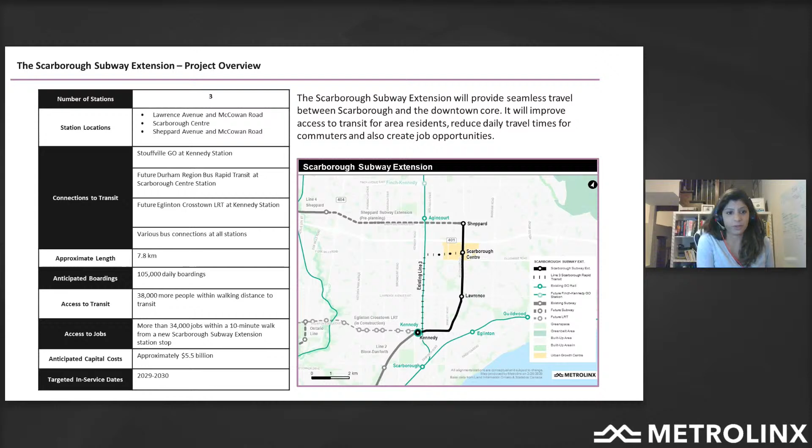The first contract is our advanced tunnel contract, and this is live and under construction. If you've driven by the Sheppard and McCowan area, you'll see a lot of construction activity underway, and the construction team's going to talk about that in just a little bit. STRABAG is our constructor.

I did mention the length of the project, and we anticipate tunnel completion by 2024. The second contract is the station's rail and systems contract, which is the remainder of the work: the design and build of the 3 stations, as well as ancillary buildings like emergency exit buildings, traction power substations, and all the supporting infrastructure needed to operate the line.

A key milestone that was reached is that we issued the request for proposal just recently, to 3 teams, which we're very excited about. The 3 teams are Dragados, KSX Integrated Design Builders, and Scarborough Transit Connect.

We're actually looking to deliver the station's rail and systems contract through a progressive design build model, which is a little bit different, and it's the first time we're doing it for transit here in Ontario. It's a key milestone for us, and a progressive design build delivery model is more of a collaborative model where we're working a little bit more closely with our development partner.

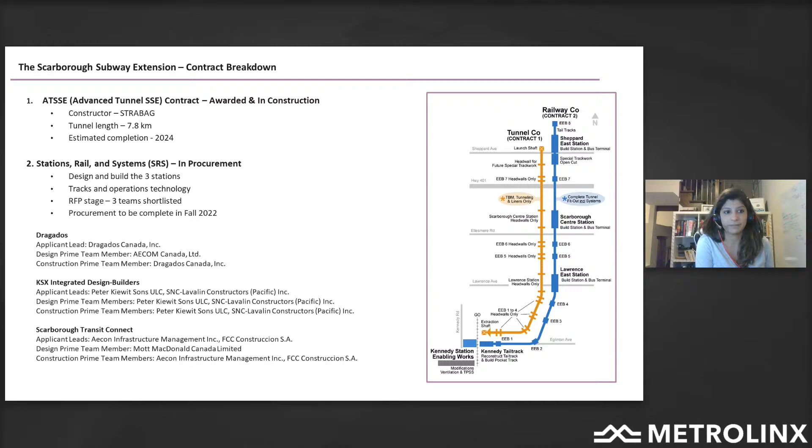Launch shaft is where we put our TBM, or tunnel boring machine, inside. It travels 7.8 kilometers and does the tunnel, and the extraction shaft is used for extracting the TBM.

In the launch shaft, we started activities last year and did quite a lot of work. The launch shaft should be prepared sometime in June for the start of the TBM.

The TBM is in the meantime already being assembled. It arrived in Canada last year in December, and assembly should also be finished by the beginning of June this year. Then the TBM will start its drive all the way to the extraction shaft.

During and before this drive, we will construct the head walls, locations of future stations and emergency exit buildings. We start with the first head wall next week, and we will continue this work all through the end of 2023, next year.

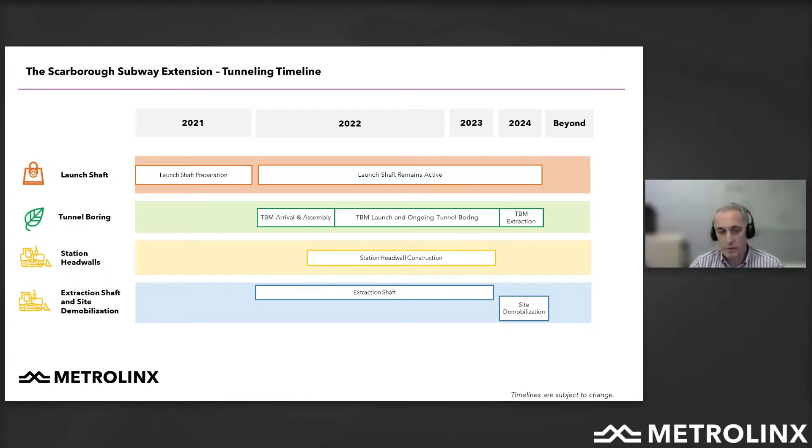The last activity is the extraction shaft, where we pick up our TBM. We started this activity this year and have to complete it before the TBM reaches this point. After extraction of the TBM, the last activity will be site demobilization, by the end of 2024.

As head wall manager, I will be responsible mainly for head walls and the surface works. A little bit more about head walls: like I said, we start on the first location next week.

This is Sheppard East Station. A month after that, we start on location EEB7. Some 14 days later, Scarborough City Center. And then a month later, EEB6.

This year we also start with two EEBs, number 5 and 4, and finish them this year as well. We also have Lawrence and EEB3 starting this year but finishing in the first quarter of next year. The last two EEBs, emergency exit buildings, we will start in the middle of March next year and plan to finish by October next year.

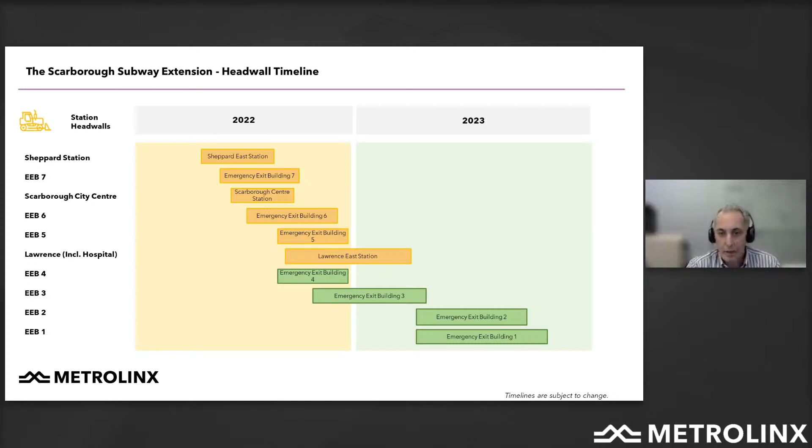There are quite a lot of trees along the alignment where we have our sites, so we have a special tree removal program.

We started removal of trees on February 15th. Most of the trees we will remove by the end of this month, with some little trees left to remove at the beginning of next month. We are notifying all the nearby residents, and the trees that will stay we will protect during construction.

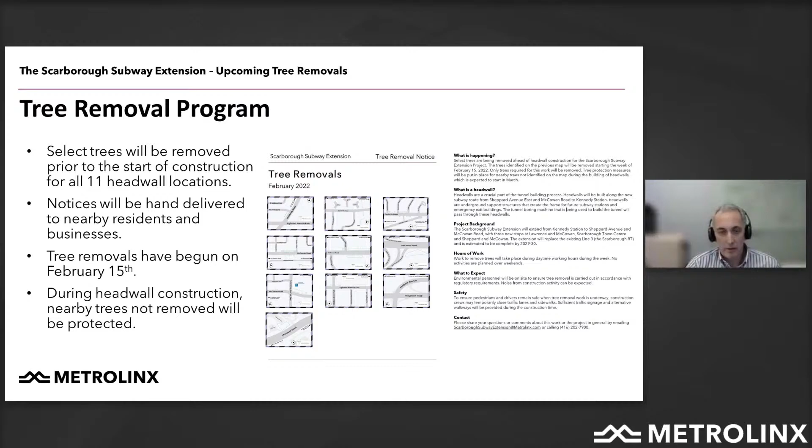All our works regarding tree removal and surface works are planned to be done during daylight time, so at the moment we do not plan any night shifts.

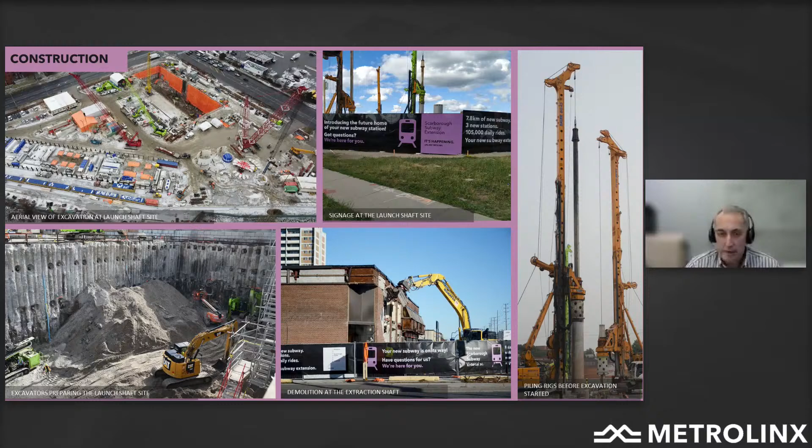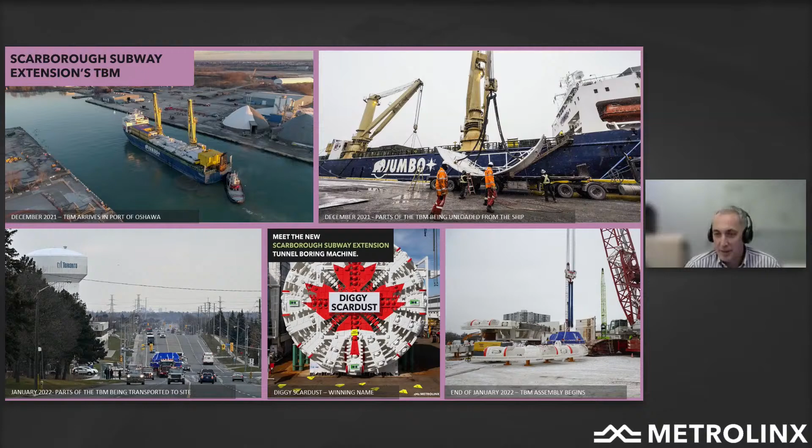There's also a secondary entrance located on the north side of Lawrence, also west of McCowan. This will provide quick and efficient connections to customers wanting to access the hospital, which is immediately adjacent to the entrance. We know the hospital is a major employer, employing more than 2,000 people, and this connection will provide a rapid option to employees who work here.

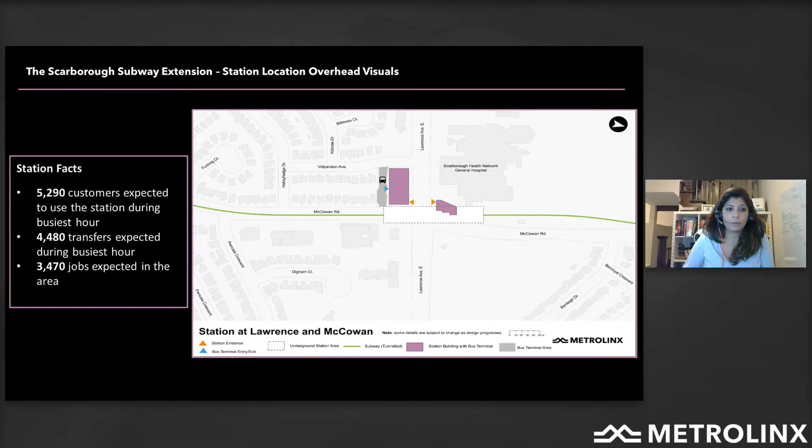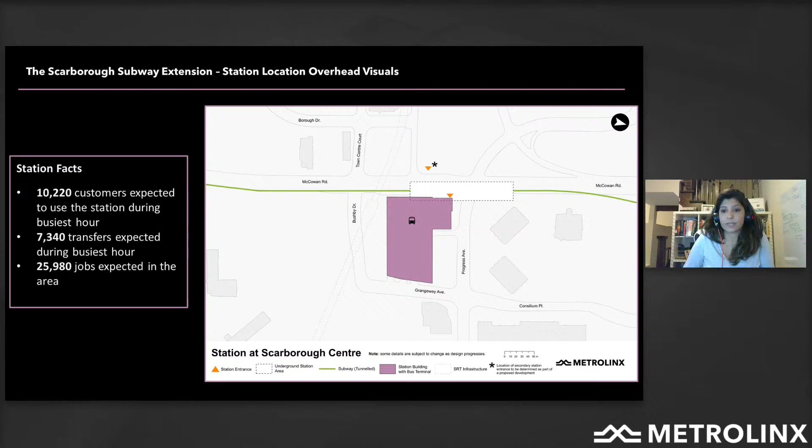An important note is that the station is going to be a busy station. We anticipate over 7,000 transfers at the busiest hour and approximately 37,000 daily transfers. We can move to the next slide.

Passenger-focused design. When we talk about passenger-focused design, it's good to understand that underneath all the engineering, the technical requirements, and the underlying systems that run the transit line, the stations are designed for you, the user, and also the surrounding community. Design of the station will focus on ensuring that you have a seamless, intuitive, and reliable station and station connections.

The stations are designed to last with material choices that are robust and long-lasting. The station will be designed and planned to make your intermodal connections seamless, regardless of what your next mode of transportation will be. Future growth will be at the forefront of our minds as we guide the development of these stations. This will include space-proofing for strategically placed knockout panels. This protects our future growth and helps keep the station running.

In regard to maintenance, the choice of materials is important. That's why our standards promote robust material selection. This directly feeds into making the maintenance of the station safer, easier, and which will also lead to a more reliable transit system.

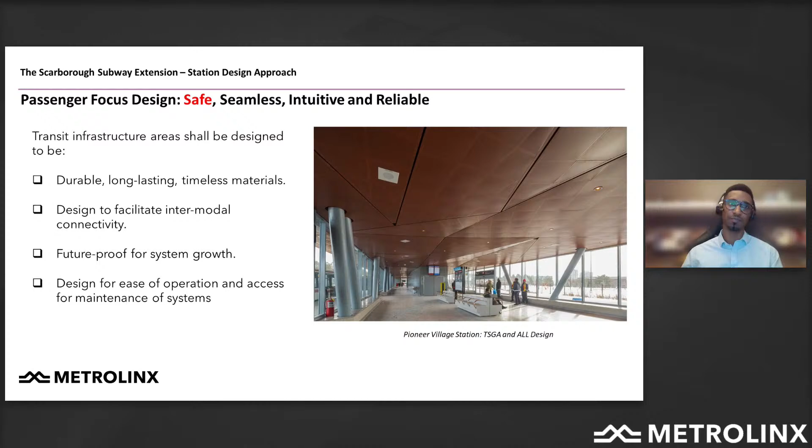Passenger focus, safety and accessibility. Stations will be designed to be safe for transit users, regardless of ability. We'll do this architecturally by trying to minimize the vertical and horizontal connections and make these connections as short and as direct as possible. We'll have waiting areas, rest areas, multiple elevator paths to the platform, and designated waiting areas with redundancy where needed.

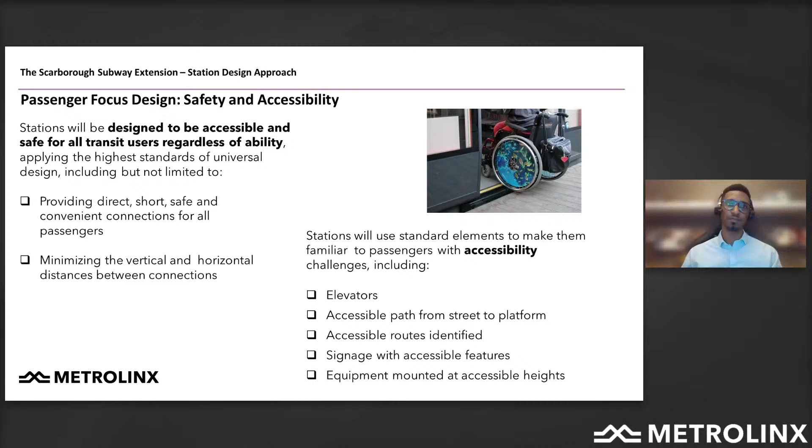Passenger focus in the public realm. Transit infrastructure is a key part of the public realm. Subway stations act as a major piece of infrastructure in the city. Stations act as a backdrop to our lives. The station acts as a gateway to the city and brings the rest of the city to the neighborhood. These stations will be iconic in the sense they will act as a landmark for the neighborhood. That is why the public space is so important. It is that interstitial space that connects the station to the community.

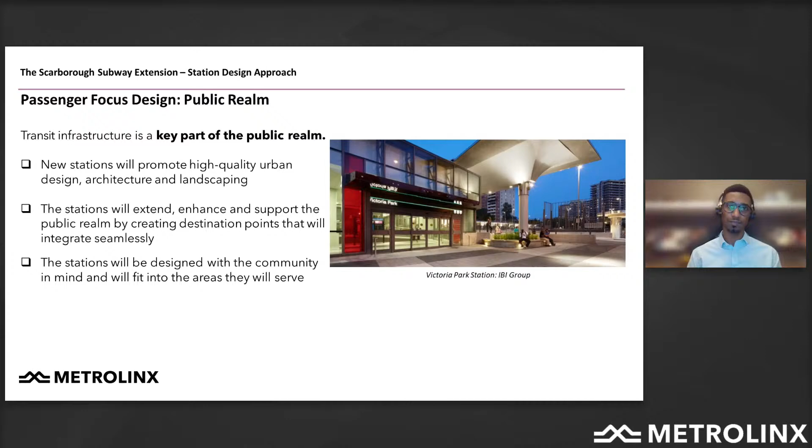We recognize that these spaces provide landscape features, hard paving, seating areas, and these will act as a bridge between the street and the entrance.

Passenger-focused design and intuitive wayfinding. When we talk about wayfinding, it's not only about signage, which we have robust standards for. It's about making sure that we create an environment that allows all users to use the system regardless of their familiarity with the station. It's about knowing where to go and how to get there as seamlessly and intuitively as possible. It's also not only about what's on the inside—it's about making the stations a recognizable symbol in the community. Regardless of the site context, there'll be elements similar enough that make the station recognizable as a station. This will include landscaping, street furniture, entrance canopy, signage, and the way that we approach the interior finishes.

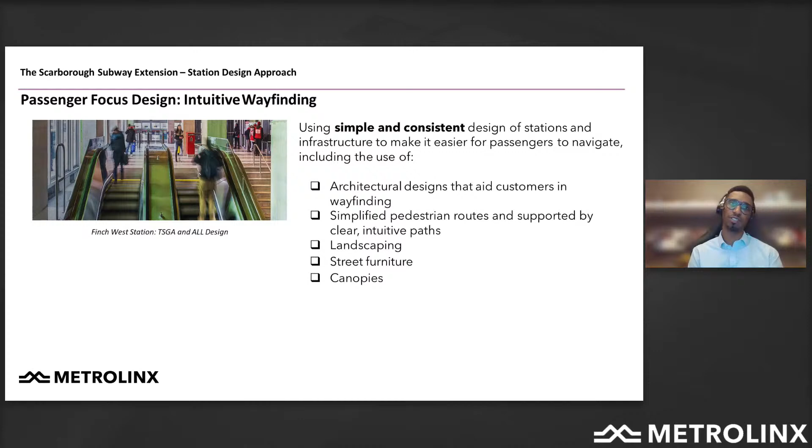Next slide, I think that's it for me.

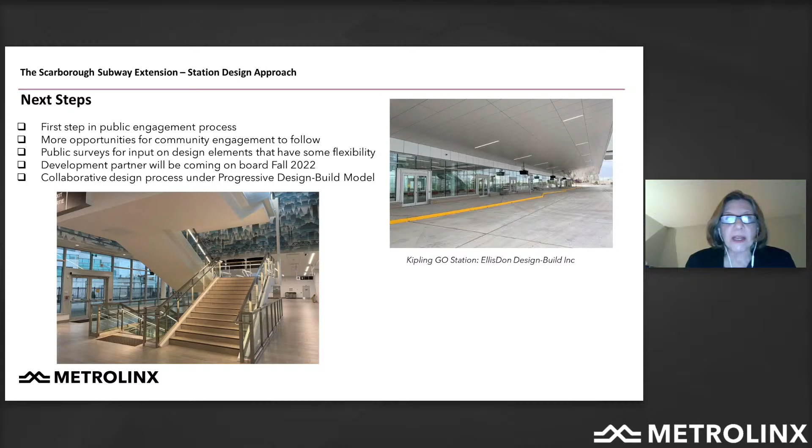With regard to next steps, this is really just the first phase in our public engagement process. We're going to have many more opportunities for public engagement in the design. This will include examples like conducting surveys about specific design elements and also having future open houses. As mentioned earlier, our development partner will be coming on board this fall. With our procurement model, we will have a very collaborative design process, so this actually makes it easier to have public engagement than with other development models.

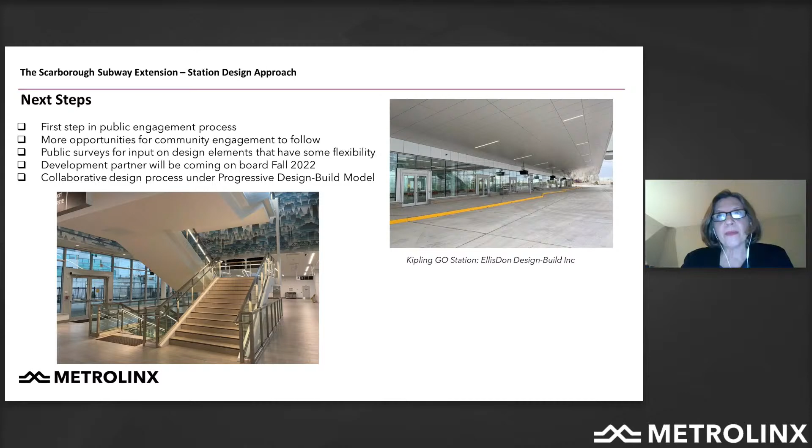To the project team, thank you Jenny, Ade, Victoria, and Andre for going through the content to discuss with everyone this evening. This slide is really important, and I want everyone to pay attention, especially for some folks that see ongoing projects happening in Scarborough as a region as a whole, and they may have some questions that are not related to what's happening on the Scarborough Subway Extension.

So our promise is to be a connection to support you with getting all of your questions and concerns answered. Our project email address is Scarborough Subway Extension at Metrolinx.com, and we also have our project number there, which is available 24/7 for you to reach out if you have any questions or concerns.

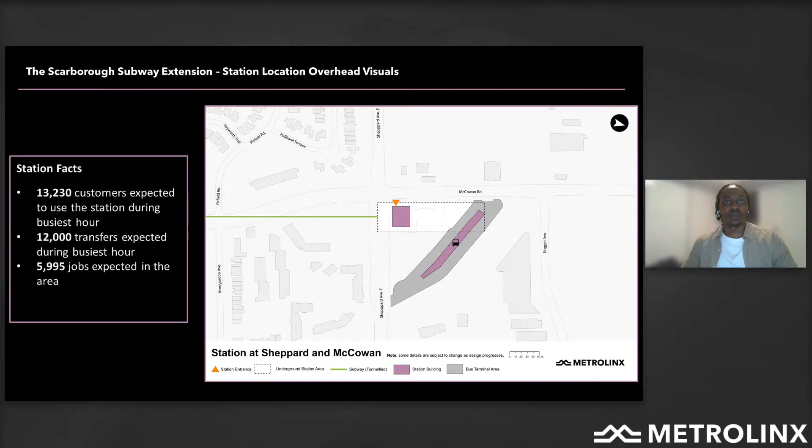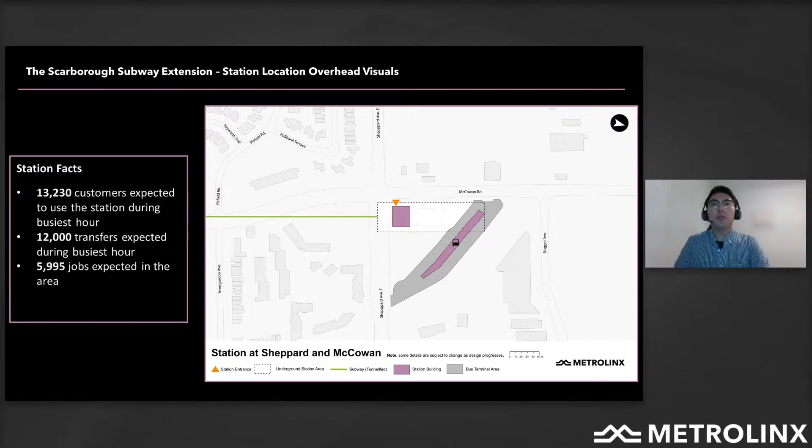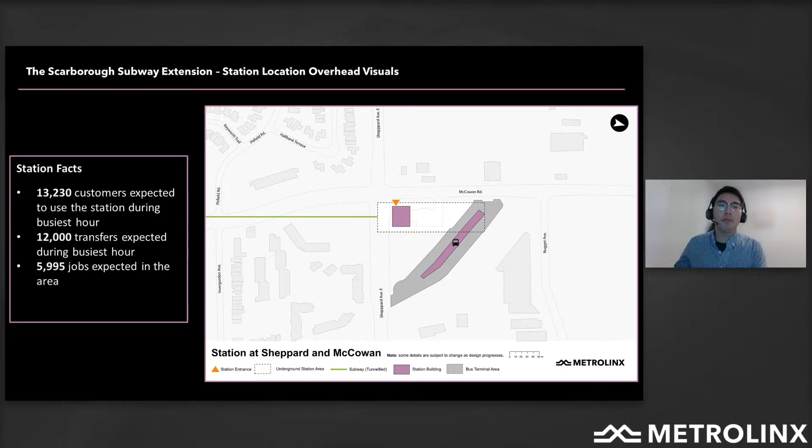Thank you. The next question we have is how does Metrolinx and the City of Toronto minimize impact on local businesses? I'm going to start with a bit of an explanation, and then I'll probably lean to my project team to add some more context.

When it comes to the impact on our communities and businesses, one of the main differences from this project versus others, like the Eglinton Crosstown that folks in Scarborough relate to, is that most of our activity is happening underground. So the types of support and impacts we offer might differ slightly, but we do plan to introduce a Shop Local campaign. We're going to collaborate with our local business BIA, representing the Sheppard East Village BIA, to develop a strategy and plan to help businesses that may be impacted. Again, with our subway stations underground, the types of impact will be slightly different. I don't know if anyone on the team wanted to add to that.

So I'll jump to the next question. Will there be public washrooms at the stations? Yes, there'll be public washrooms at Scarborough Centre Station and at Sheppard Station. Thank you, Victoria.